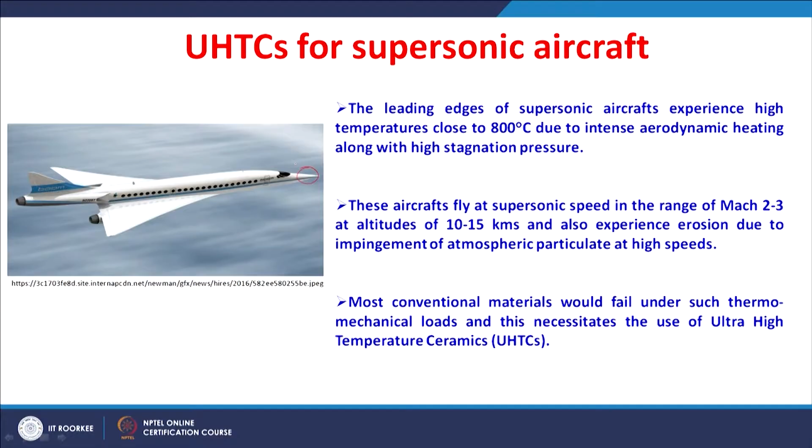These supersonic aircrafts travel at a very high speed of Mach 2 or Mach 3 at altitudes of around 10 to 15 kilometers, and while traveling they may also experience erosion due to impingement of particulates from the atmosphere, and this particle impingement may lead to material damage.

Most of the conventional materials would fail under these thermomechanical loads. That necessitates the use of ceramics, and the ceramics for this particular use have high melting points, so that you can use them safely at these temperatures of 800 Celsius without any degradation in the strength. Those ceramics are generally called ultra high temperature ceramics, and they are preferred for these components used for the supersonic aircraft.

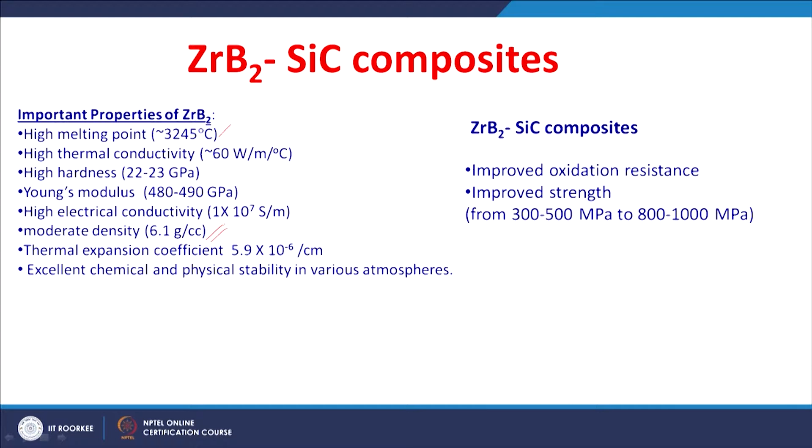In the family of the ultra high temperature ceramics, zirconium diboride based ceramics are attractive because of their important properties: very high melting point of more than 3200 Celsius, high thermal conductivity of around 60 watt per meter per Celsius, very high hardness leading to superior wear resistance, Young's modulus very high around 500 gigapascal, good conductivity, and moderate density. This moderate density is helpful for using this material for structural applications, along with excellent chemical and physical stability in various atmospheres, making them candidate materials for high temperature applications.

It is already reported in several studies that by adding a certain amount of silicon carbide to zirconium diboride, we can improve the oxidation resistance of these ceramics, and also improve the strength. For example, without silicon carbide, zirconium diboride will have around 300 to 500 MPa strength. By adding silicon carbide, the strength may go even up to 1000 MPa.

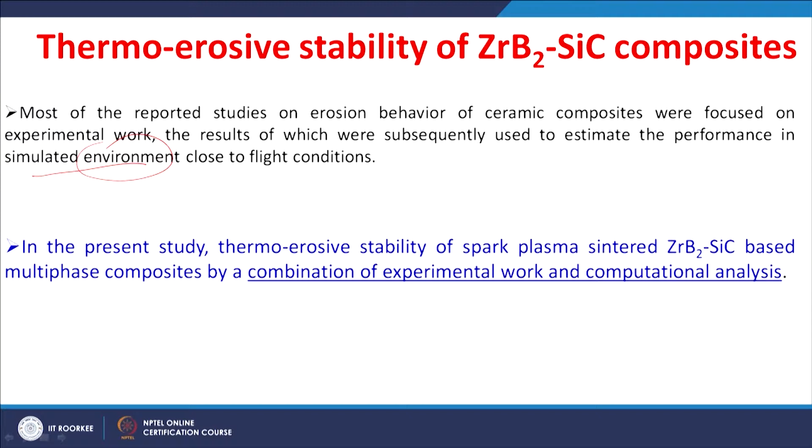Most of the reported studies on the erosion wear behavior of ceramic composites, not only zirconium diboride but various ceramic composites, were focused on experimental work, and the results of this experimental work were subsequently used to estimate the performance in simulated environments close to the flight conditions. That means experimental work is done, and the results of the experimental erosion work are taken as input for the computational or simulation studies close to flight conditions.

In the present study, we demonstrate that a combination of experimental and computational work is more useful to understand the behavior of these ceramic composites in high temperature erosion conditions. Particularly, we will see how computational analysis helps understand the erosion behavior of zirconium diboride silicon carbide based composites, and its significance in understanding experimental erosion test results on the thermo-erosive stability of these composites.

The objectives of the present study are to study the erosion behavior of zirconium diboride silicon carbide and titanium composites using a solid particle erosion tester at high temperatures of 800 Celsius, to understand the dominant wear mechanisms in the selected erosion conditions, to determine the temperature and stress distribution in the eroded region using finite element analysis, and finally to understand the thermo-erosive structural stability of the selected composites.

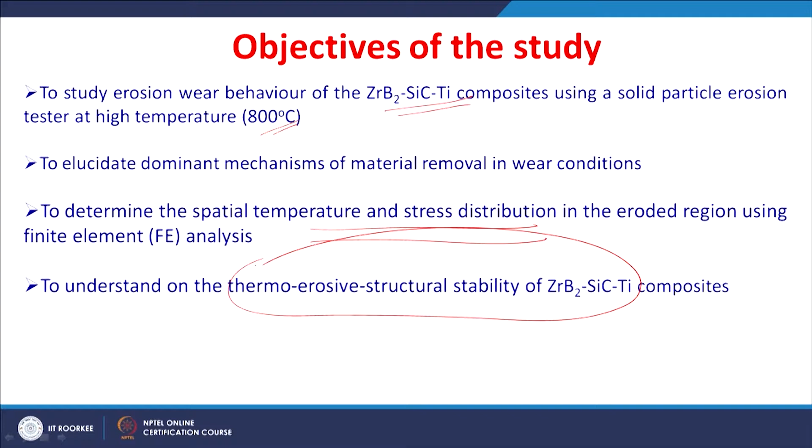These composites were prepared by spark plasma sintering. First, the powders of zirconium diboride, silicon carbide, and titanium were taken and mixed in a proportion of zirconium diboride with 18 weight percent silicon carbide, with titanium amount varying from 0 to 10 weight percent. These powder mixtures were kept in a die and then subjected to spark plasma sintering, which gave a decent density of more than 98%.

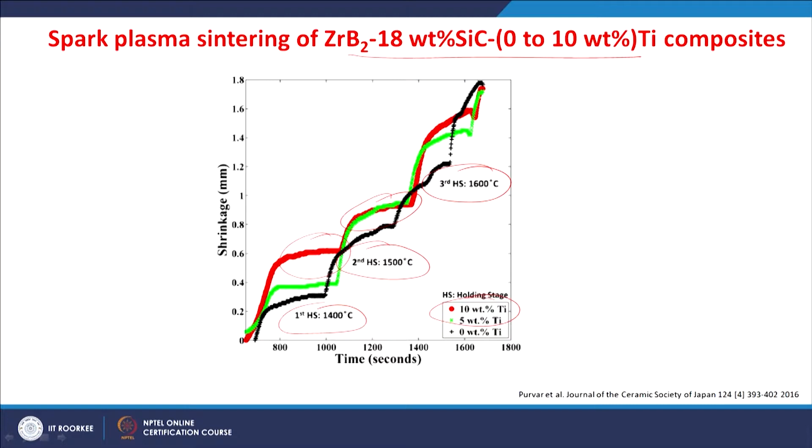The shrinkage further increased in the next stage, and maximum shrinkage was obtained in the third stage of sintering. The microstructure of these composites particularly shows zirconium diboride grains and silicon carbide particles.

Silicon carbide particles, and then titanium. The titanium, being a lower melting material, forms a liquid melt while increasing the temperature during sintering. This liquid melt penetrates between the particles of the zirconium diboride and silicon carbide and facilitates sintering.

Such a liquid phase sintering gives us densification earlier than that used without this titanium.

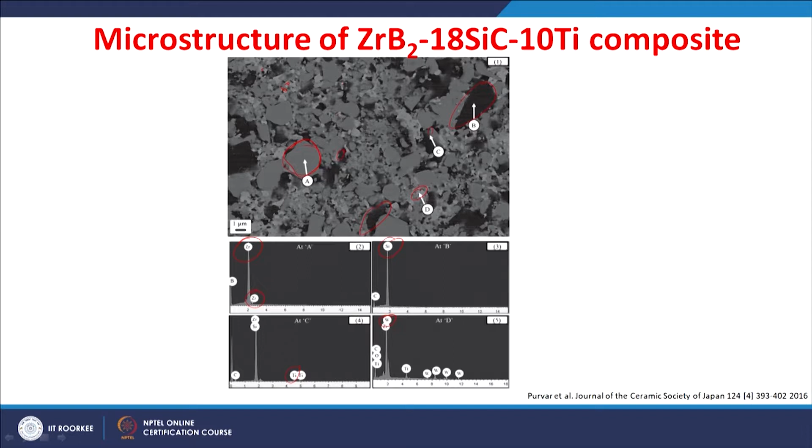These two materials, zirconium diboride with 18% silicon carbide, and zirconium diboride with 18% silicon carbide and 10% titanium, were taken for investigating the erosion wear behavior. These are designated as ZST0 and ZST10. ZST0 means no titanium, ZST10 means 10% titanium.

The hardness and fracture toughness values were determined by Vickers indentation. The hardness increased from 17.5 gigapascal to around 29.2 gigapascal by adding 10% titanium in the baseline composition of zirconium diboride silicon carbide. Fracture toughness also improved from 3.7 to 9.0 MPa root meter.

There is a very large improvement in the hardness and fracture toughness by adding only a smaller amount of 10% titanium in the composite. This also indicates the densification is improved by adding titanium, which reflects in the microstructural characteristics and the mechanical properties. In another study it was also found...

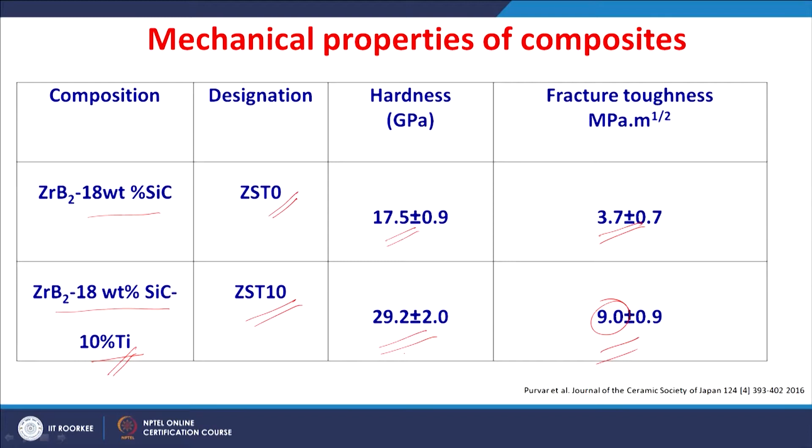Among the two investigated composites, the composite with the titanium addition showed higher hardness and fracture toughness.

With this information, we conducted the high temperature erosion test, using a high temperature particle erosion tester. Silicon carbide particles, which we call erodents, of around 40 to 50 micron meter size, were mixed with air, and this mixture was used to erode the surface of the composite.

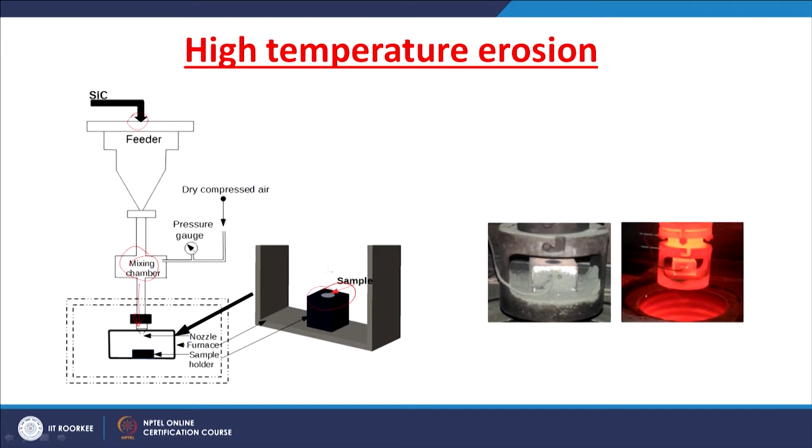We can see the real time photograph of this material when it was at a high temperature of around 800 Celsius.

And this mass flow rate of the impinging erodent particle, where this m dot can be found out by density, cross sectional area of the leading edge, particle mass flow rate, and C, a constant - generally max C is a maximum annual dust concentration, which was taken at 129.6 microgram per kilogram of air.

This was taken from the literature. Based on the above calculations, the kinetic energy deposition estimated for the hypersonic vehicle leading edge is around 35.6 megajoules per meter square.

So the kinetic energy we know this by half m dot v squared times T of exposure. We know the mass flow rate of the impinging particle, the time of exposure in the test, and we know the density of this erodent and the sample cross sectional area.

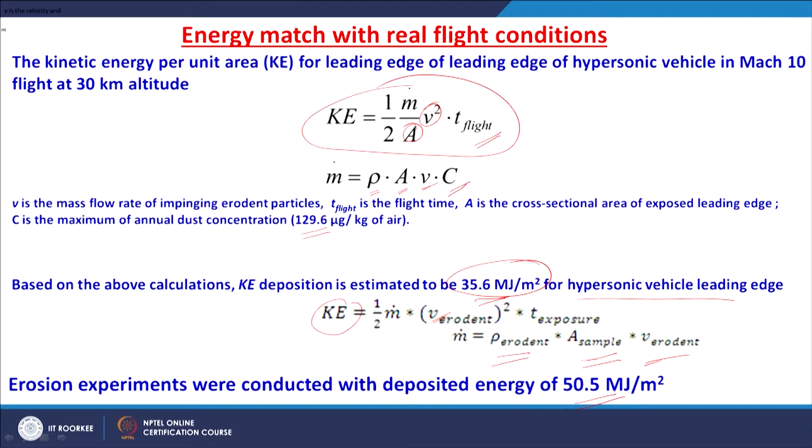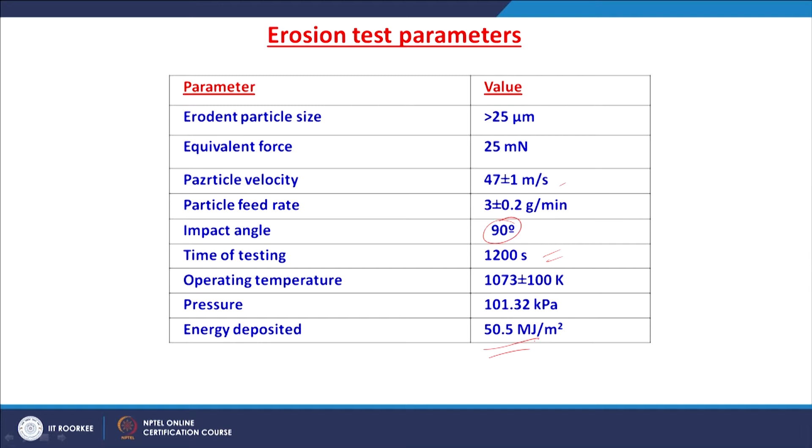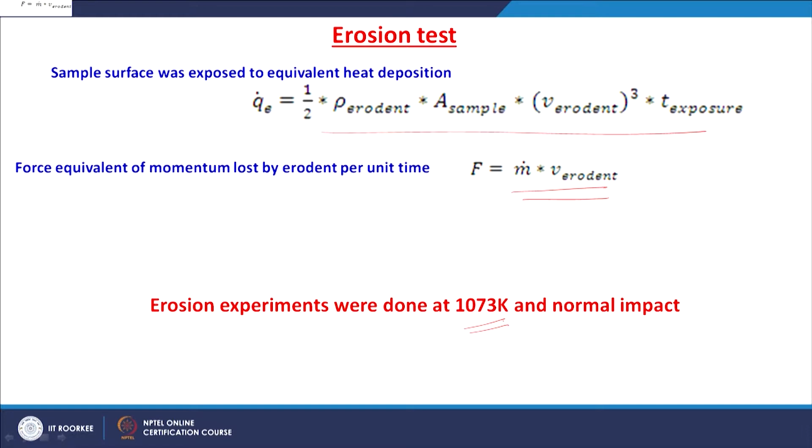The sample surface was exposed to equivalent heat deposition as given, and the force equivalent of momentum lost by erodent per unit time were also calculated. Erosion experiments were done at 1073 Kelvin, that is 800 Celsius, at normal impact. This selection of 1073 K is based on the limitation of the erosion test equipment. Normal impact was selected because ceramic composites usually fracture to a larger extent at 90 degrees angle, leading to maximum wear.

When titanium was added in the powder mixture and sintering was done, certain sintering reactions occurred before erosion: zirconium diboride with silicon carbide with titanium gives zirconium carbide, titanium diboride, and also zirconium silicide, titanium boride, titanium carbide, titanium silicide, zirconium oxide. So several possible reactions can be thought of.

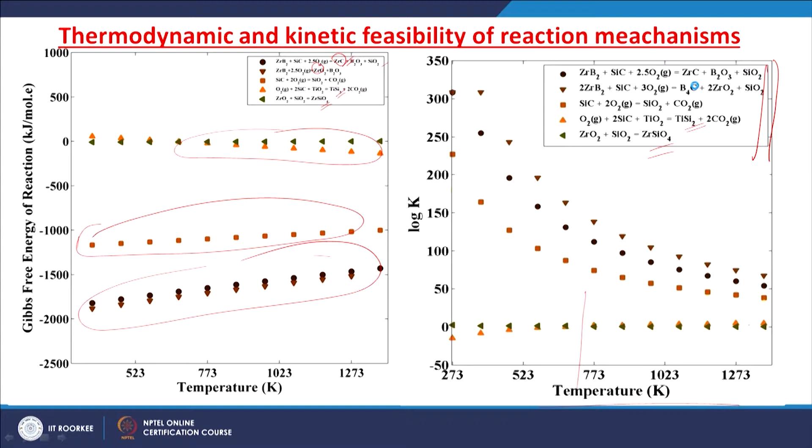So we have certain phases: zirconium carbide, boron oxide, silicon oxide, boron carbide, zirconium oxide, titanium silicide, zirconium silicate, etc. We have several phases on the surface. One important observation is there is no titanium present. Even before starting erosion, sintering itself resulted in compounds of titanium boride, titanium silicide, and titanium carbide. So we do not have any metallic titanium, indicating it was consumed completely during sintering, forming different phases. Because of the formation of these hard phases, we have an improvement in hardness and fracture toughness.

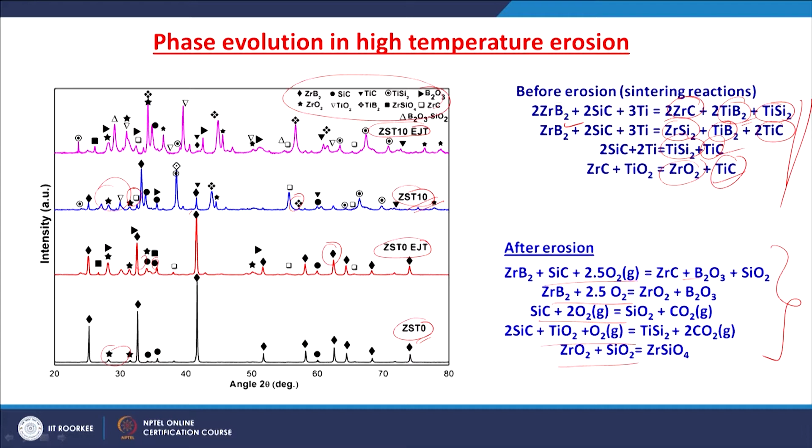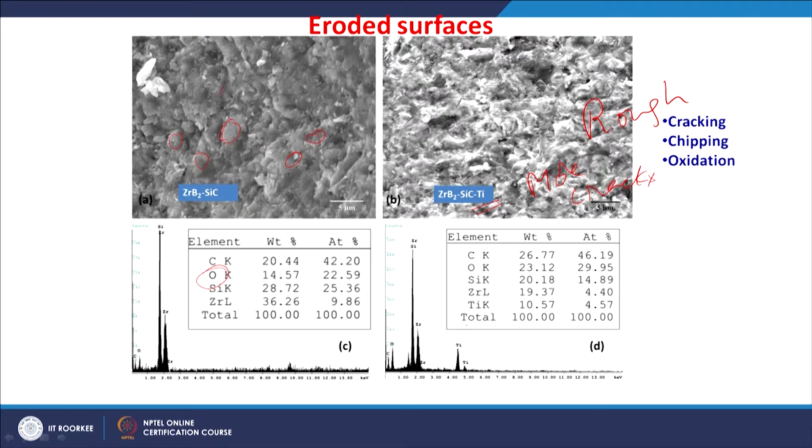Overall the material is removed by cracking, chipping, and oxidation for these two composite materials. The results from the high temperature erosion test: the material removed is measured by weight loss and converted into volume loss, then converted into volume loss per kilogram of erodent, which we call the erosion rate.

The high temperature erosion test results show a decrease in the erosion rate from ZST0 to ZST10. You can see from 35.86 mm cube per kilogram to 33.49 mm cube per kilogram change in erosion rate observed when we add 10% of titanium in the composition.

If you relate this erosion rate with the mechanical properties, we can see there is a large improvement in the hardness and fracture toughness, almost 1.7 times increase in hardness and 2.5 times increase in fracture toughness by adding 10% titanium in the baseline zirconium diboride silicon carbide composite. But this combination of increased mechanical properties resulted in only 6% or 6.6% improvement in the erosion wear resistance. So there was a large improvement in mechanical properties by adding 10% titanium, but this reflected in only 6.6% improvement in wear resistance.

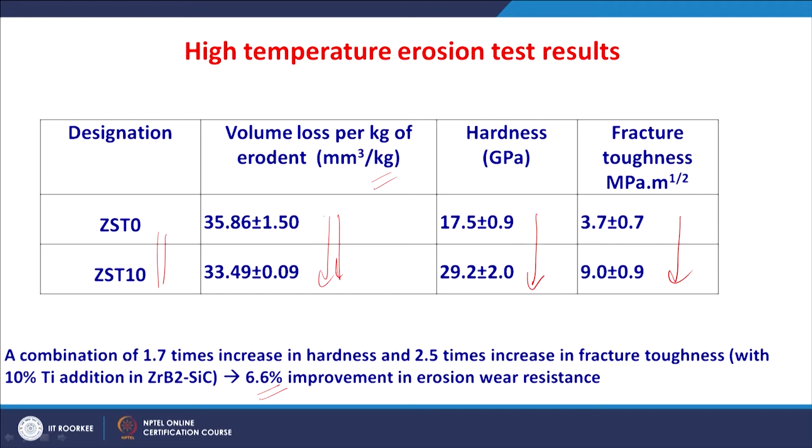All the properties like thermal conductivity... In the FE modeling, the boundary conditions used are: the surface of the sample is exposed to equivalent heat deposition, and a uniform force equivalent of momentum lost by the erodent per unit time on the exposed portion of the flat face of the composite. And the other boundary condition is modeling.

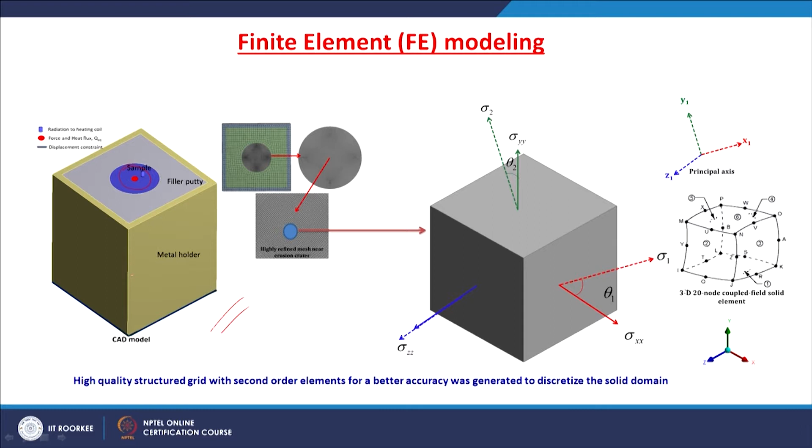We have displacement constraints at the back wall and along the walls of the holder. The displacement of the rear face of the sample holder is constrained in all directions.

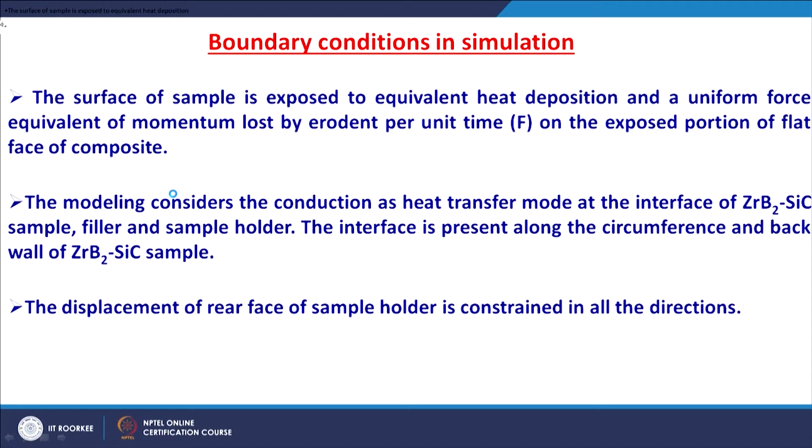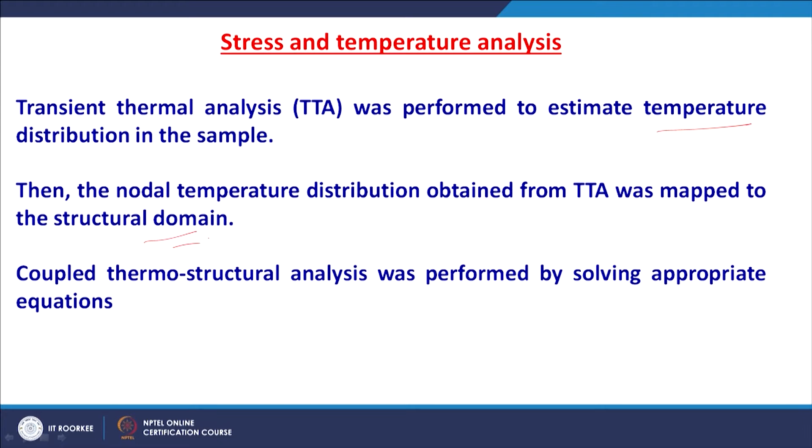Stress and temperature distribution was studied first by transient thermal analysis and then thermostructural analysis. Initially, transient thermal analysis was performed to estimate the temperature distribution in the sample. Then the nodal temperature distribution obtained from the transient thermal analysis was mapped to the structural domain, and then we have a coupled thermostructural analysis by solving appropriate equations.

High temperatures are also observed in the filler material, mainly because of its lower thermal conductivity compared to these two samples, either ZST0 or ZST10. Compared to these two sample materials, the thermal conductivity of the filler material is very low, so conduction is difficult in the region of the filler, and you get high temperatures at the filler regions. This can also be due to lower specific heat capacity of the filler compared to these two materials.

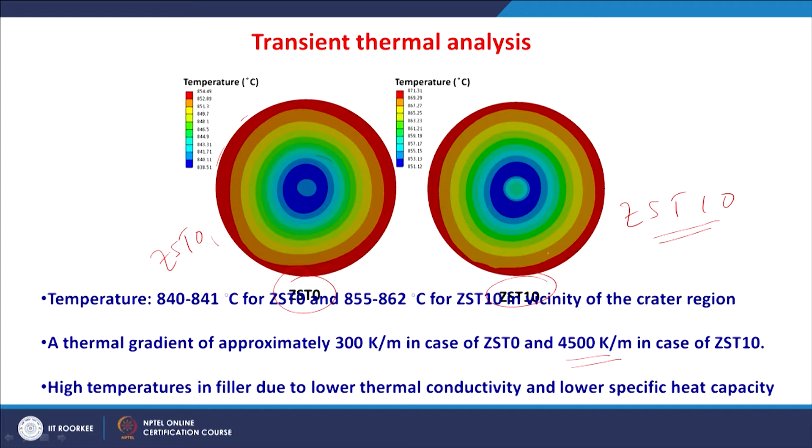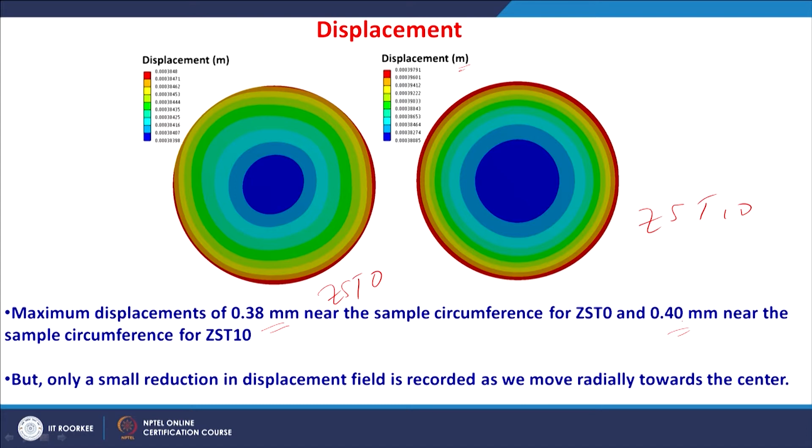We can also see the displacement analysis. This again is for ZST0, this is ZST10. So maximum displacement of around 0.38 mm near the sample circumference for ZST0, and 0.40 mm near the sample circumference for ZST10 are found. You can see this is in meters. But only a small reduction in the displacement field is recorded as we move radially towards the center.

But if you see the stress analysis, von Mises stress values were calculated. In case of ZST0, there is a less difference in stress from the center of the crater to the crater periphery.

So, the stresses are around 38.6 MPa in the center of the crater to 49 MPa for the crater periphery. This less difference in the stresses from the crater center to the crater periphery for ZS T0 is because of the less difference in the temperature in the crater region. So, almost uniform temperature is maintained, and you do not have any difference in the stresses.

But if you see ZS T10, there is a large difference in stress from the crater center to the crater periphery. This is mainly because of the distinct thermal gradient visible in the temperature contours. You can see for ZS T10 the temperature at the crater center is higher than the temperature near the crater periphery, so the stresses found were also very large in case of ZS T10.

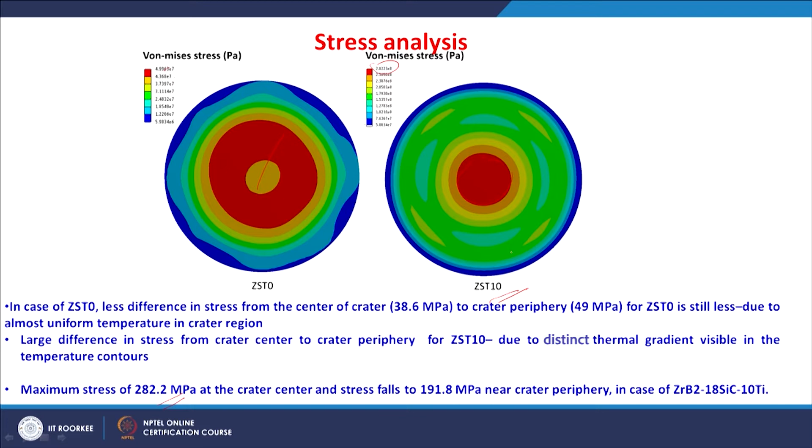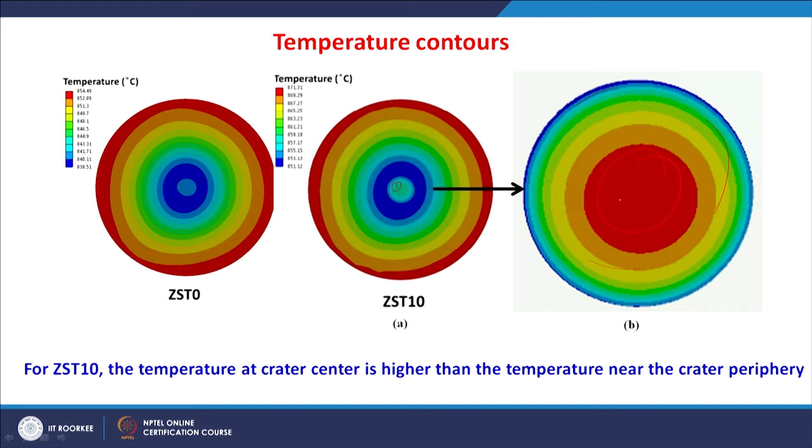So, a maximum stress of 282 MPa is found at the crater center, and this stress falls to 192 MPa nearer the crater periphery in case of ZS T10. Such a difference in the stresses can be understood because of the temperature differences from the center of the crater to the periphery. For ZS T10, the temperature at the center is higher than at the crater periphery. You can see this simulation for the temperature contours of the crater region only.

We must understand there are certain inherent residual stresses at room temperature because of the difference in coefficient of thermal expansion of various phases present in the material, but these stresses tend to relax at higher temperature. So, the stresses in the oxidized sample as estimated in this work using finite element analysis are additional stresses developed during high temperature erosion.

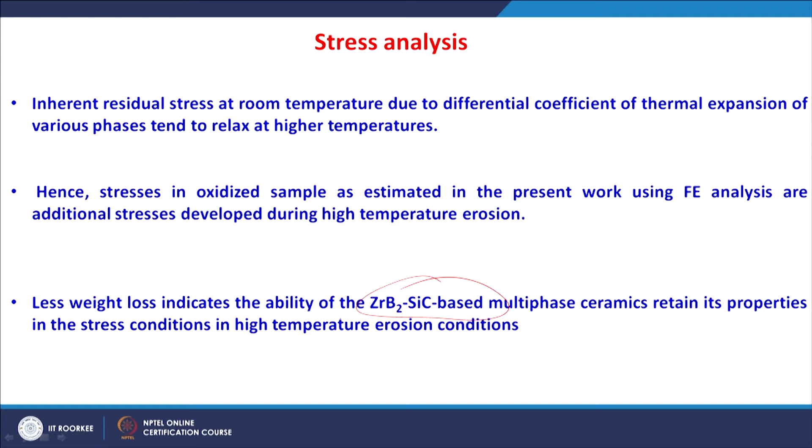We can also see there is very less weight loss because of this erosion. This very less weight loss indicates the ability of this zirconium diboride silicon carbide based multi-phase ceramics to retain the properties under stress conditions in high temperature erosion.

Let us also understand the effect of oxidation on the mass loss in erosion. The samples were very carefully flattened to see the oxidation layer thickness. For ZS T0, the maximum thickness of this oxide layer is around 25 micron meter, whereas for ZS T10 the maximum thickness is around 7 micron meter. The ratio of mass gain due to oxidation to the mass loss due to erosion is very less: 0.0035 for ZS T10 and 0.0124 for ZS T0.

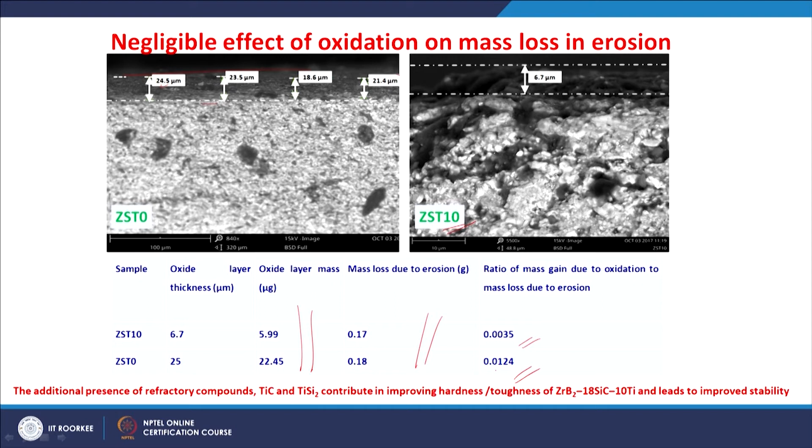That means very negligible effect of oxidation on the mass loss due to erosion. The mass gain due to oxidation is negligible compared to the mass loss due to erosion. That means the material is removed significantly by mass loss during erosion. We can also understand that the additional presence of refractory compounds, for example titanium carbide, titanium silicide, contribute in improving the hardness or toughness for the zirconium diboride silicon carbide titanium composite, leading to improved stability.

Finally, let us conclude the salient results obtained from this study. The erosion rate of zirconium diboride silicon carbide titanium composite is 6.6% lower than that of zirconium diboride silicon carbide composite.

The eroded samples reveal mainly cracking, chip formation, and oxidation as dominant mechanisms of material removal for the composites. X-ray diffraction analysis as well as realistic assessment of the thermodynamic stability at computationally predicted wall temperatures indicate the possibility of formation of several phases: zirconium carbide, zirconium oxide, boron oxide, silicon oxide or titanium oxide on the composite surfaces in the selected conditions of erosion.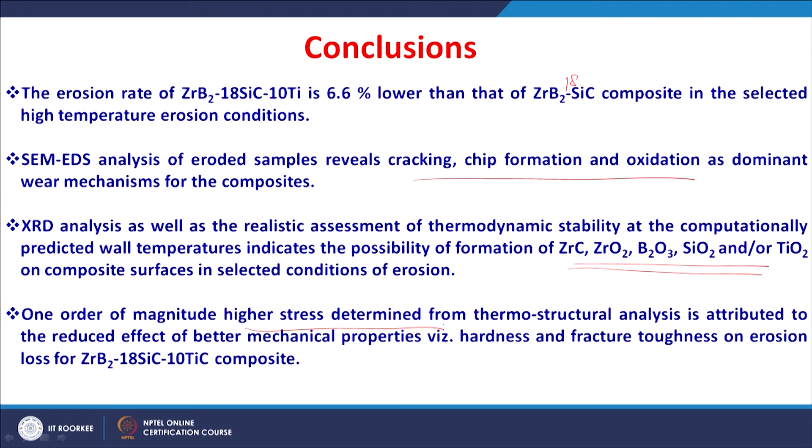One order of magnitude higher stresses are determined from the thermostructural analysis. These higher stresses are attributed to the reduced effect of better mechanical properties like hardness and fracture toughness on the erosion loss for zirconium diboride silicon carbide titanium composite.

So, in spite of having large improvement in hardness and fracture toughness, there was less improvement in the erosion wear resistance for the zirconium diboride silicon carbide titanium composite compared to zirconium diboride silicon carbide. This discrepancy can be understood only by this computational analysis that we did using the finite element model.

The understanding obtained from this approach of combining experimental results and computational analysis is very much significant in selecting suitable material for the thermal protection system of supersonic vehicles experiencing erosion wear. This particular study proposes or demonstrates necessary guidelines for assessing thermal, erosive, structural stability of materials utilizing a novel approach of coupling experimental results and computational analysis.